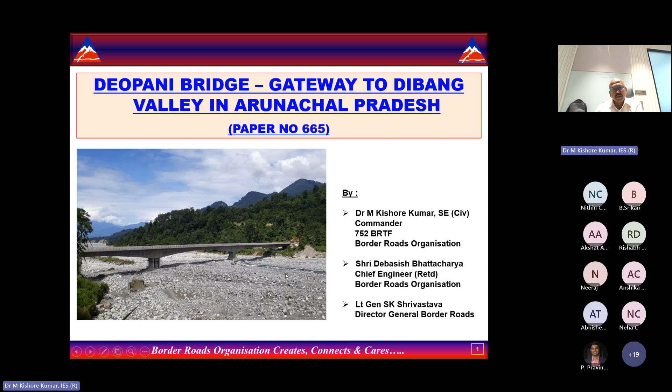My presentation sequence is as follows: I will give you an overview of the bridge site, then salient features of the permanent bridge, project execution, followed by conclusion and a photo gallery of the various works we have done in Arunachal Pradesh.

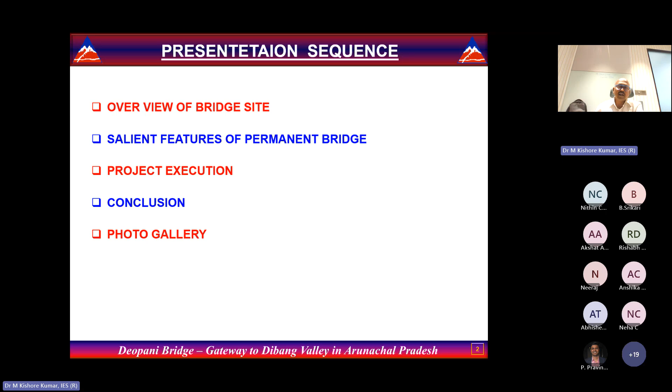The overview of the bridge site: Arunachal Pradesh is in the extreme corner of India, the more eastern part of the northeastern states. The sun rays are experienced first in Arunachal Pradesh, and I happened to be in the easternmost part of Arunachal Pradesh.

There is a district called Lower Dibang Valley, and the bridge is exactly at a place called Roing, which is around 150 kilometers from a place called Dibrugarh. In Assam, on the Brahmaputra, there is the Bhupen Hazarika Setu, a 9.15-kilometer long bridge which was inaugurated in 2017 by the Honorable Prime Minister. Prior to that, I was there from 2015 to 2017.

I had to do the ferry crossing because the bridge was not commissioned. All my logistics, everything was coming via this river gap through the ferry logistics. I'll be covering that in my subsequent slides also.

This is in a very extreme locality which was not connected by road. This is a difficulty which we faced at the time of construction of this bridge.

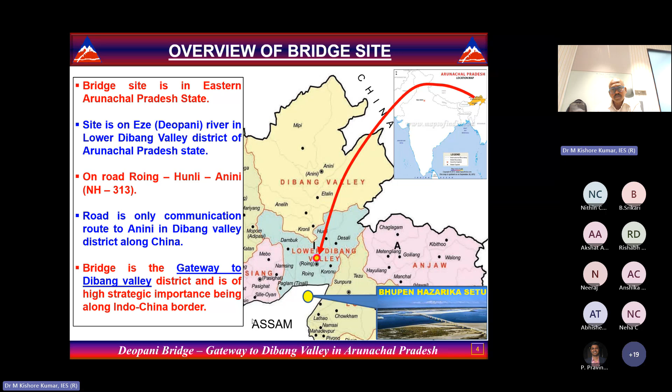The overview of the bridge site: the Deopani is a perennial river and the major tributary of the Dibang River, and the Dibang River is a tributary of the Brahmaputra River. This is my Deopani and this is the Dibang, and you can see the catchment area also. I will show you in the next one.

This picture is in the very lean season. In the monsoons, it will be totally flooded. During floods, the entire width is occupied by the flood waters.

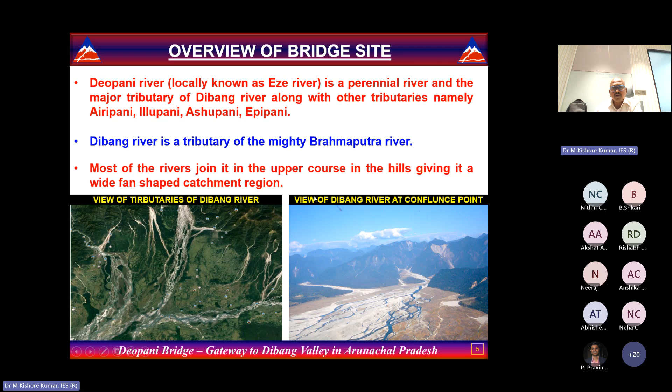Dibang is the tributary of the mighty Brahmaputra River, and most of the rivers join in the upper course. It is a fan-shaped catchment. I will show you in the next slide.

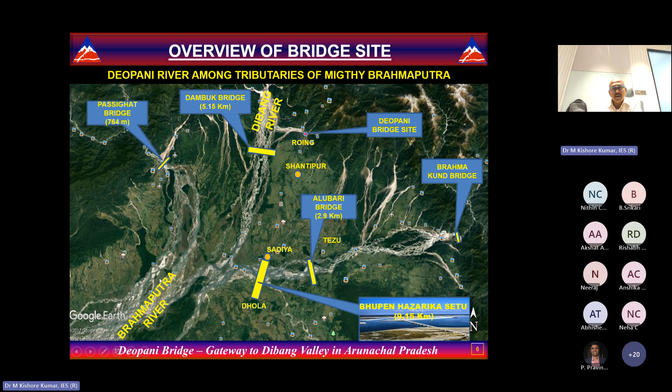This is the bridge site, and this is the Dhola Sadiya bridge, with my Deopani here. Prior to completion of this bridge, we had to ferry cross the mighty Brahmaputra. So my bridge construction logistics, man and material, everything used to come via the river ferry boats. The entire terrain is all tributaries of the river Brahmaputra, and the rivers are very ferocious.

This is my Deopani bridge site, and this is the catchment area. The catchment area has a very steep gradient, and whenever the rains happen, it is just like flash floods. All of a sudden the water rises, and there is a danger of flooding.

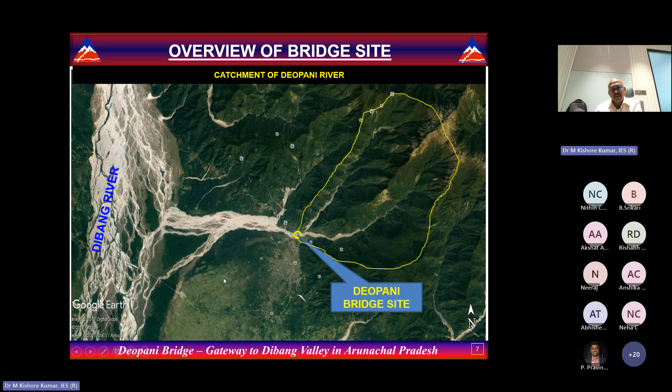I'll show you some photographs where our bridges got damaged, so you can estimate the fury of the river. This is the Mayudia Pass where snowfall occurs, and the catchment area from below Mayudia Pass is the entire catchment area of this Deopani bridge, which is again flowing into the Dibang River, a tributary of the Brahmaputra.

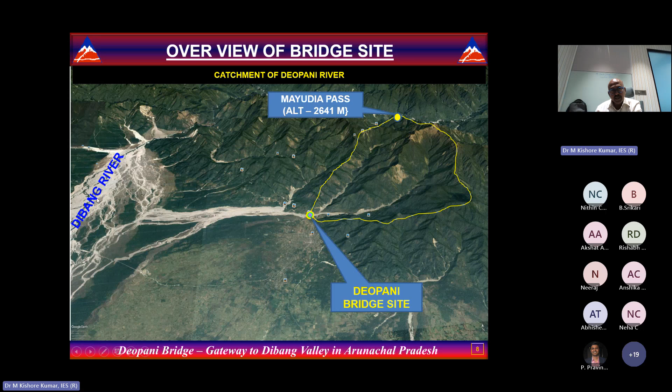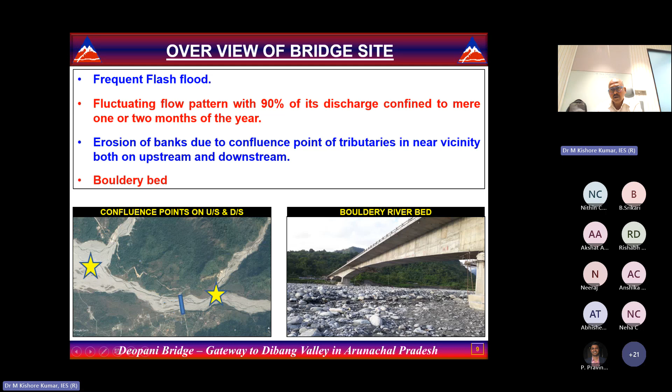This is my bridge site, and you can see the confluence of two streams on the upstream of the bridge, with a fluctuating flow pattern - 90% of the discharge is confined to a mere 1 or 2 months of the year. There is erosion of the banks due to the confluence point, and it's a boulder bed, as you can see here, all filled with boulders. This is my completed bridge.

The turbulent history of the Deopani Bridge: in border roads, we follow stage construction. We initially construct a class 5 road, that is a 4 to 5 meter width road. Then, depending on the traffic and the importance of the road, we widen it to a class 9 road, a single lane road. And if traffic further improves and there is strategic importance, we convert it into a double lane. This is the methodology we follow for road construction.

First of all, the stage construction gives ample access for future expansion of the roads, future widening of the roads. Secondly, we can connect the endpoints. So that is the advantage with stage construction.

Initially, we construct a single lane road, and then further improve it to double lane, intermediate lane. During initial construction, we go for Bailey bridges, that is steel truss bridges. Once the road is commissioned with these steel bridges, we take up construction of permanent bridges in a phased manner. So we complete the road faster, give connectivity, and later give the major permanent bridges, that is RCC, pre-stressed concrete bridges. This is our modus operandi in Border Roads Organization.

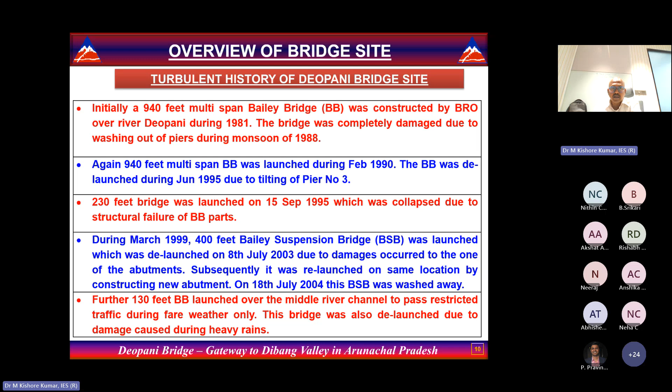There we erected one 400 feet Bailey suspension bridge with two towers on both edges. But this also got collapsed after 5 years, the Bailey suspension bridge. So finally we did a 130 feet Bailey bridge, and the operation was during monsoon time, during flood time we used to de-launch this bridge, and whenever the rains recede we used to relaunch this bridge. So this was our mode of action to cover this river gap.

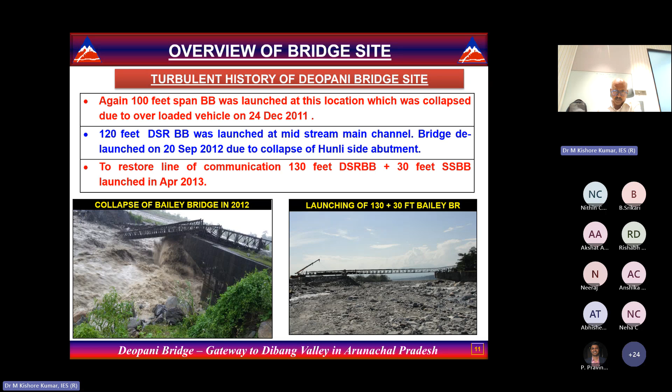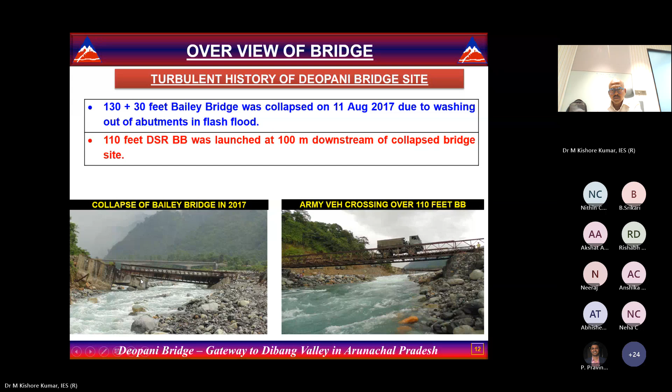This is again the sort of damage you see, the bridge got collapsed, the abutment got tilted, and the entire bridge went down. So this is the fury of the river.

So just to have a permanent solution, one permanent bridge of 300 meters length was planned at this site. We have taken this site on the upstream side of the Bailey suspension bridge. So this is the plan, this is the river, this is the site of the 300 meter permanent bridge at Deopani River.

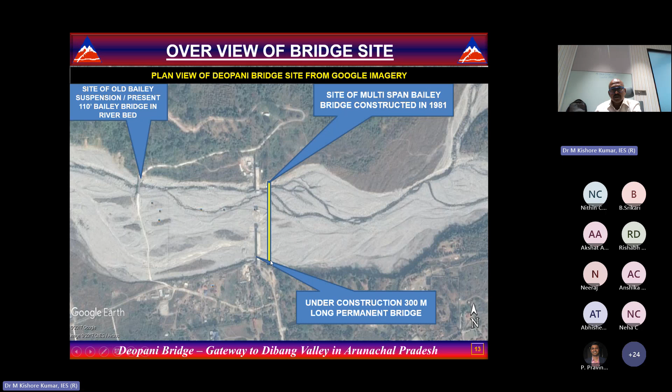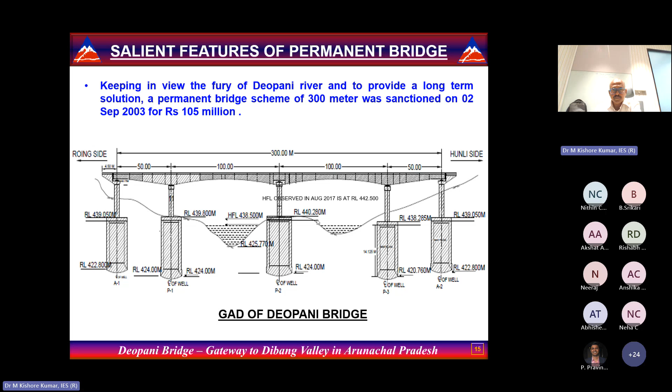The design discharge is 1824 cubic meter per second. Design highest flood level is 438.5 meters. But it surpassed that record, and we experienced the highest flood level going up to 442 meters in 2017. So this was the design discharge adopted at the time of initial planning, but we observed the flood level went up to 442 meters, 4 meters higher.

The span arrangement, as I told you, end spans of 50 meters and middle spans of 100 meters, a total 300 meter bridge. The soil classification is soil mixed with huge boulders. Scour depth considered is 9.1 meter for abutment and 14.38 meter for piers. Foundation is the well foundation.

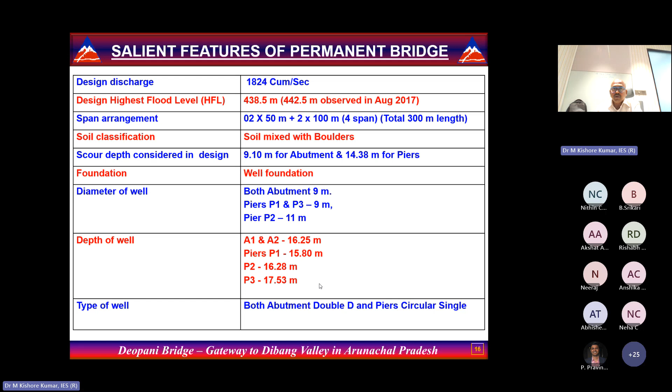Diameter of the well: abutment wells are 9 meters. Piers P1 and P3 are 9 meters, and the central well, P2, is 11 meter diameter. Depth of the well: abutments are 16.25 meters, pier P1 is 15.8 meters, pier well at P2 is 16.28 meters, and pier well at P3 is 17.53 meters. Type of well is single circular well for the piers, and double D for the abutments. So this is the arrangement for the permanent bridge.

The superstructure is a continuous balanced cantilever. Overall width is 12.35 meters. It is a double lane carriageway, 7.8 meters, and it includes footpath also, so that's why it is 12.35 meters. Safety barriers and footpaths: we adopted 0.45 meter safety barrier, 1.5 meter footpath, and 0.35 meter railing.

Type of bearing is the PTFE bearing. Type of expansion joints is rubber seal expansion joints, and wearing coat is RCC. We could have gone for mastic also, but here we were bereft of the equipment, so we went for the RCC.

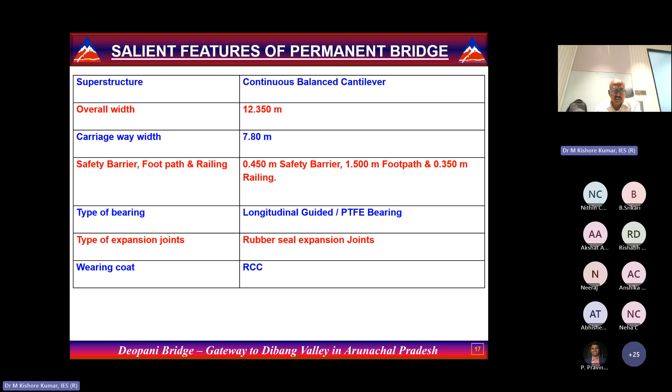Project execution: this 300 meter long bridge was sanctioned in September 2003 for 10.5 crores. So this was my initial estimate sanctioned cost, 10.5 crores in 2003. The contract was awarded to Messrs Banka Infrastructure, a Bombay-based firm. Work commenced on 12 July 2004.

The contracting firm is said to have experienced some financial hardships, causing abandonment of the work in 2007. That is, after commencement of the work, after 3 years, the firm abandoned the work. They had some financial problems and couldn't do much of the work. They did only the abutment work, and then they ditched it and went away. At that time the progress was just 36% at the time of cancellation of the contract in 2008.

With both abutments done, Pier P3 completed, and 64% sinking of P1 and P2 completed by the contractor - this was the state of affairs when the contractor abandoned the work and when the work was cancelled. The progress was 36%. He did only the abutments, both completed, and Pier P3. Then 64% of the sinking he has done in P1 and P2. P1 and P2 are the mid pier wells. So this was the state when the contractor left.

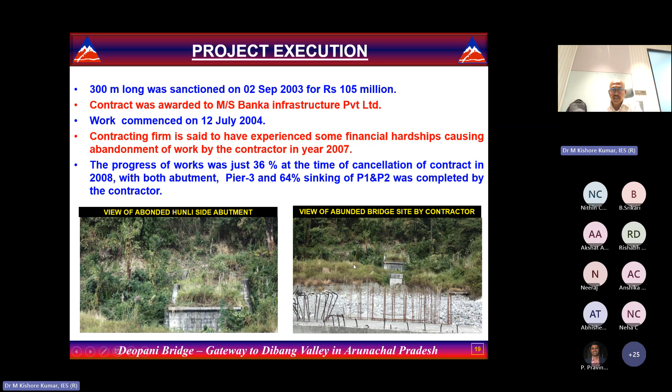The decision taken post cancellation of the contract: the department decided to execute the balance substructure work through departmental manpower. That means P1, P2, and P3 wells were to be sunk, and we had to do the substructure - the pier P2 also we had to construct. So all these things we decided to do departmentally, and superstructure through the risk and cost contract. That is, we would award the work to a different contractor, and whatever the difference in cost, it would be borne by the initial contractor. So that we call the risk and cost contract.

The substructure work through departmental mode was recommenced in the year 2010. That means we took another 5-6 years to decide the mode of execution and all those things, because it involved legal complications. Then completion of the balance substructure work, balance well steining and pier shaft P1 and P2 took even 7 years by BRO departmental resources.

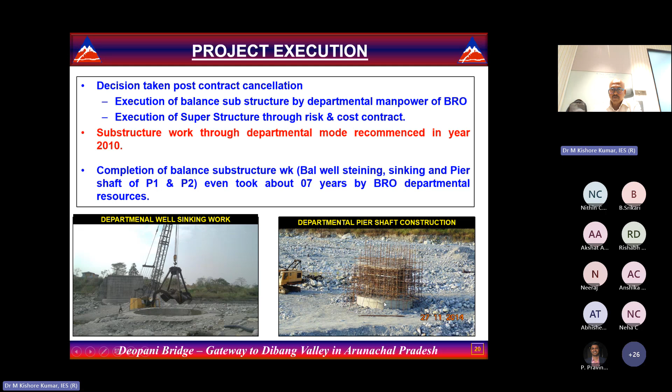If you see here, this is the well sinking in process. This is the grab where they used to grab the earth from the inside - that's how this is a part of the well sinking operation. And this is the pier substructure, the pier under construction over the pier well. This is the pier well capped, so the pier is under construction.

If you see the challenges we faced for the construction, there was encounter of large boulders on the cutting edge. This is a picture where the people are standing - they are 16 meters down the riverbed, inside the river well. You can see these are the boulders, right under the cutting edge. This is the cutting edge, so these are the boulders.

Because of these boulders, we were not able to sink the well. So for that, we had to drill these boulders and blast them and then remove the boulders. Only then could the sinking operation be resumed. So this is the difficulty we used to have. This is the compressed drilling machine - you can see the jackhammer drilling the holes in the boulders, and thereafter we put the gelatin and blasting material and blast it. Blasting also has to be done in such a way that it should not damage the well - it should not damage the well steining or well cutting edge.

The very high seepage rate meant we used to operate 3-4 pumps continuously. Only then could we enter the well and operate inside it. High skin friction was also an issue, so the rate of sinking was very slow.

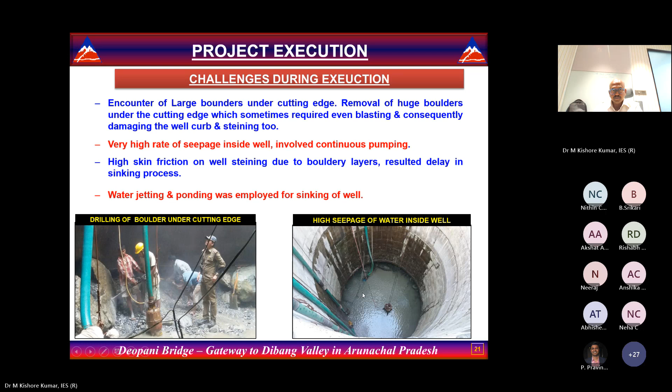For pier well P1, in 2010-11, 4 meters was achieved in the entire year. In 2012-13, only 4 centimeters of sinking was achieved - that was the only progress in the entire year. In 2013-14, 1.3 meters. So for getting 5.37 meters of well sinking, we took almost 8 years.

So this is the well sinking. You can see these are the people standing at the bottom, and this is the cutting edge.

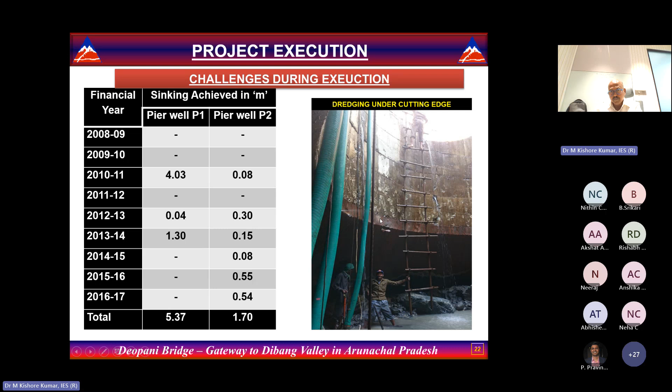Challenges faced during execution include conveyance of logistics and construction stores required via ferry crossing. Our entire vehicles were put on boats and we had to cross the Brahmaputra river to reach the other side.

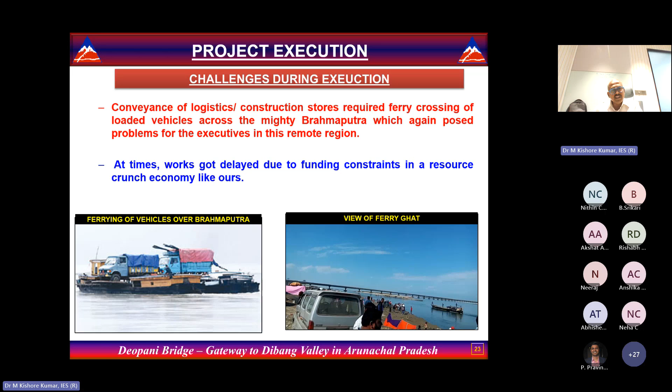At times, works get delayed due to funding constraints in a resource-crunch economy like ours. This is the bridge - it was under construction at that time - and this is the ferry crossing. These are the jetties, the shores of the coast of the Brahmaputra, where we used to ferry cross the materials. Entire logistics - cement, steel, diesel, everything - had to be crossed across the Brahmaputra on these ferries.

Revision in foundation level: we faced a problem because we couldn't do the sinking at the desired rate, and secondly, it was not possible for us to sink beyond a certain level. So we had to decide on the optimum sinking level at which the well can be rested, for which we had to carry out a very exhaustive exercise.

The riverbed is on the foothills and water flows from the hill mass with the mass debris of landslides, causing deposition of muck on the riverbed. Whenever we used to undertake the well sinking operation, the entire slush used to come and fill up the well, so we couldn't carry out the sinking operation. We used to have a window of only 2 to 3 months to undertake this sinking operation.

We cannot predict the rainfall either - sometimes heavy floods happen in July, and sometimes in October or November. These are erratic climatic conditions. The lower bed level at the time of the hydraulic study was 432, but it was further aggraded to 438. A lot of bouldery beds used to come and settle down, and as a result, it's not just degradation - sometimes you get aggradation also, where the river level gets graded up.

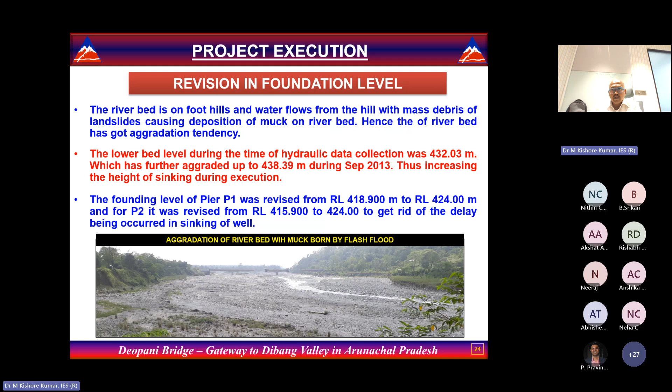The calculations were based on proper design: design discharge was 1824 cubic meters per second, effective linear waterway is 205 meters, silt factor 4, and HFL was 438.5. Based on that, discharge per unit was 8.9 cubic meters per meter. The scour depth was calculated using Lacey's formula: 1.34 times Db squared by Ksf, to the power 1/3.

KSF is the silt factor, which was coming to 3.63 meters. Maximum scour depth is 2 times this, that is 7.26, and founding level is HFL minus the scour depth, DF plus 1/3, with 30% added up. So it is coming to 438.5 minus 7.26, the scour depth, with 30% added, giving 428.82.

And in case 2, if you follow the HFL 440, then it was coming to 430 meters. So ultimately I could plug the well at 424, which is on the safer side, and we could plug the well and go ahead with the substructure works.

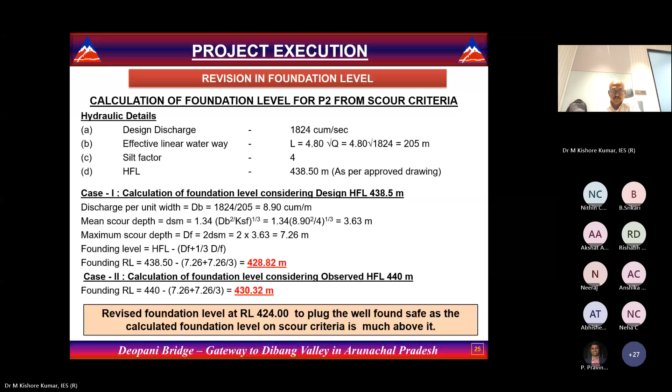Then we could complete the well foundation work, pier works, and had to hand it over to the contractor who had to do the superstructure work. He is M/s Poddar Constructions, Delhi. We awarded the work for 17.6 crores with date of commencement as November 2015. Completion period is 2 years, so that was the period where I had to put all my resources and complete the foundation and substructure work and hand over this work to the contractor for carrying out the superstructure works.

So this is the pier P2. This is the pier head which is constructed, and thereafter this is the CLC gantry where the superstructure will be taken in segmental construction, every 3 meter segment constructed, going in a cantilever mode. I will show you later on. This is the CLC gantry which is erected at the pier head.

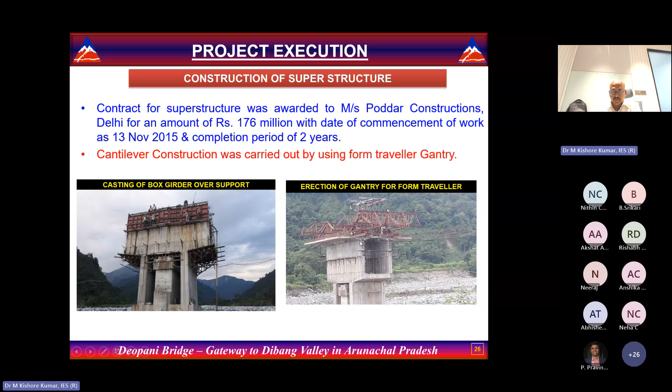This is how the construction was undertaken. This is the initial pier head, and every 3 meter segment we used to construct on both sides. Here also you can see this is the central pier P2, and the superstructure was progressing on both sides of the pier. This is the first span of 50 meters, and the other side of 50 meter span, and these are the 200 meter middle spans. You can see the CLC gantry closing that gap.

And this is the completed bridge where we were doing the load testing of the bridge. So these are the various stages of the bridge, and once we completed the entire thing, the bridge was through, and we were carrying out the load testing.

The project execution, the bridge was completed in 2017, almost 2 months before the scheduled completion date. It was inaugurated by the Union Minister of State for Defence, and the long-awaited completion of the iconic bridge provided great relief to the people of the Dibang Valley. This is the completed bridge, a bird's eye view of the 300-meter long bridge, and it was inspected by the Arunachal Pradesh Chief Minister during construction.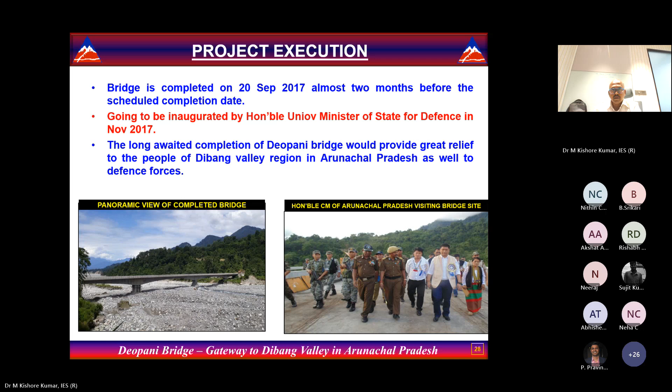My conclusion is this: the bridge construction started in 2003, and finally the construction was completed in 2017, so it took 14 long years. It had a very turbulent phase actually. Initially we had awarded the work to one contractor, and after 4 years he abandoned the work. Then the substructure and foundation work we had to carry out ourselves, and the superstructure work was given to another contractor, but prior to that we had to complete the foundation and substructure work and hand it over. So a lot of challenges we had to face.

My experience is that in 2003 the technology was not that good. But now if you ask me how to bridge this type of gap, I would say instead of going for this multi-span bridge, it could have been better had I gone for a cable stayed bridge for 300 meters span. Cable stayed bridges can span up to 400 meters, so that could have avoided the mid piers, mid wells. We could have saved a lot of time, and maybe the cost would have been slightly more.

Like all of you are aware, the Durgam Cheruvu cable stayed bridge is there. That type of bridge is okay to construct in Hyderabad. But in a place like Arunachal Pradesh, where it is not connected with the road and far off flung areas, it will again have its own challenges.

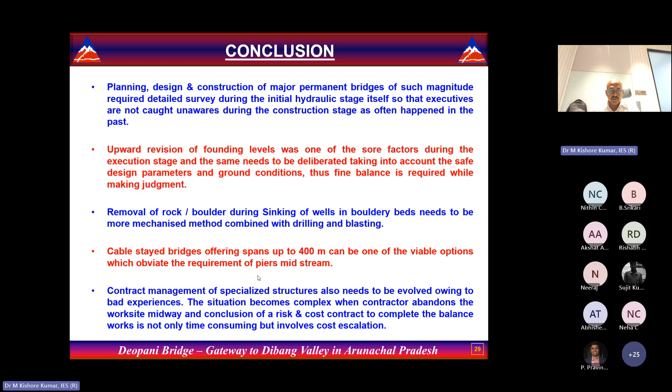Now I've come to the end of the session. This is a brief about the challenges we faced in the construction of the 300-meter long bridge.

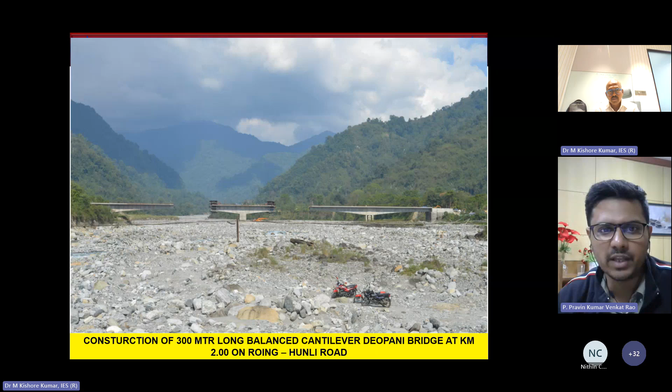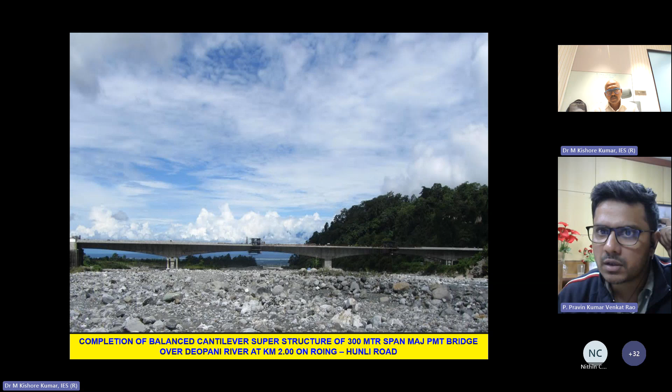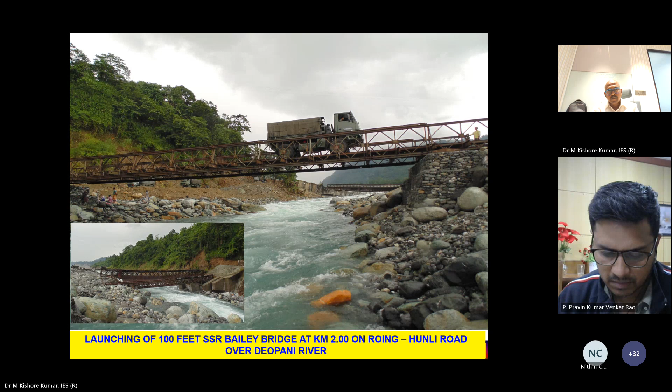Ms. Surabhi Saxena, do you want to ask any question to the speaker? Okay, nevertheless, I have one or two questions which I'll ask you.

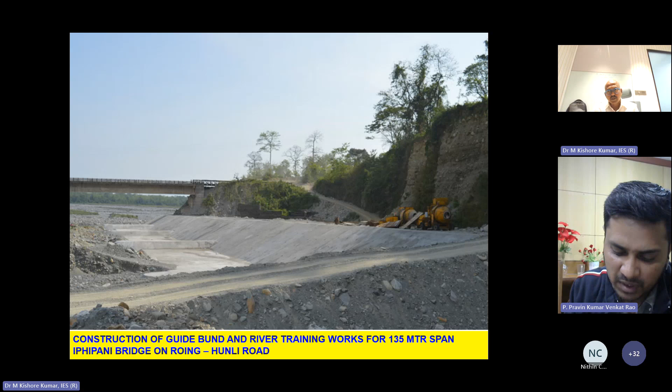What are the difficulties that have been faced, especially by your team, in sinking the well foundation on the riverbed? Could you highlight on that?

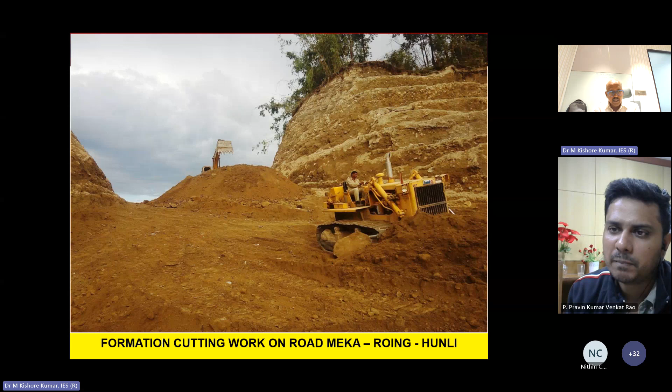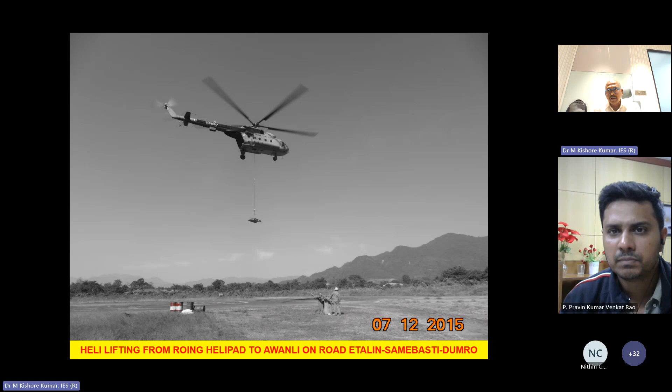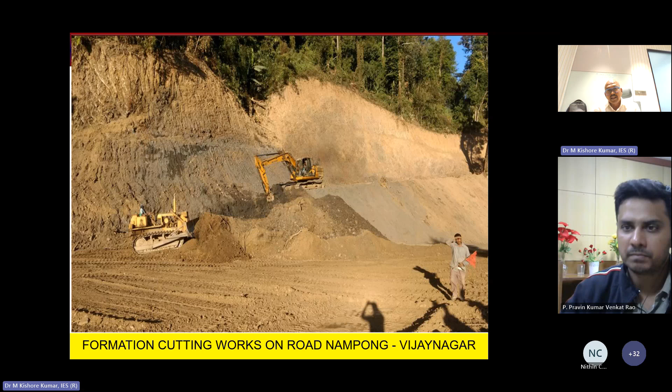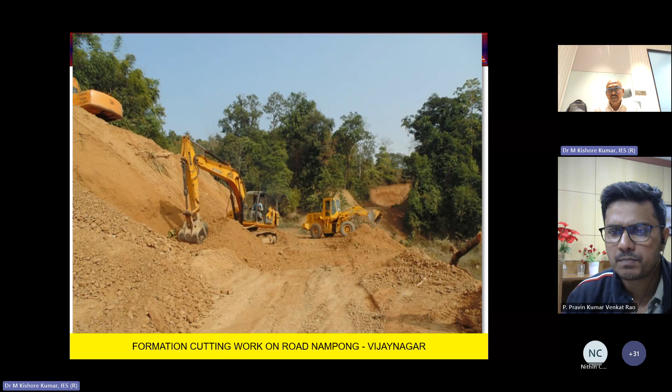Yeah, that's what I'm saying. Well sinking is a very tedious process, requiring a lot of patience first of all. After placing the cutting edge, we have to construct the steining and dredge inside the well, and it has to be done in a balanced way. You cannot extract soil from one side and leave the other, as it leads to tilting of the well. It has to be a planned effort, and it is a continuous effort taking weeks together just for getting 1 centimeter or 1 inch of sinking. So we have to keep patience, and we tried all grabbing techniques.

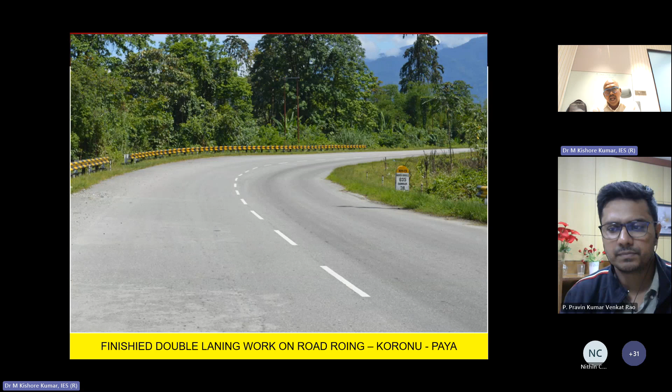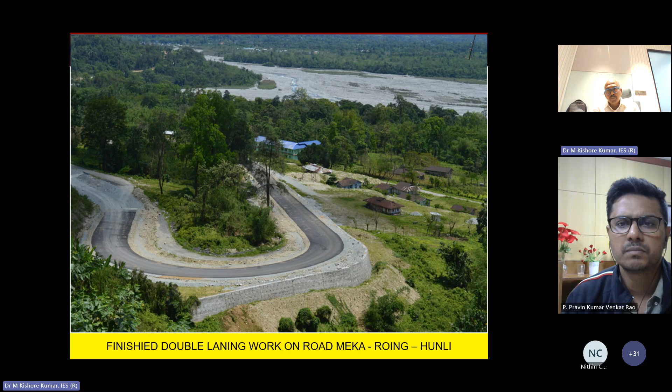Sometimes we faced boulders right under the cutting edge, which was a very challenging situation. We used drilling machines and drillers to remove them. If it was not possible, we had to drill a hole and blast it with very mild blasting, so that the steining, the river well steining, doesn't get damaged. So it has to be a very balanced and calculated approach.

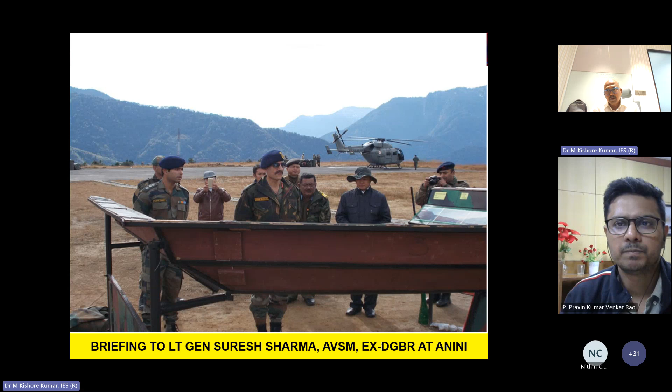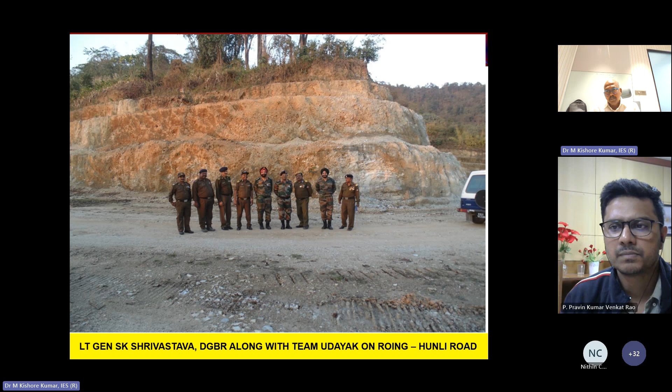And sometimes if the well gets tilted, it is a hell of an effort to rectify the tilt. We used kentledge techniques, grabbing techniques, removal of boulders through blasting, and whatever techniques were available in the textbook, we adopted everything. It was a very classic struggle, and that's why in 1 year we could sink only 4 centimeters.

Other years we could sink only 50 centimeters. It required a lot of patience. The problem was, the moment we removed the sludge and prepared for sinking, all of a sudden we experienced flooding, and the entire well got filled up with boulders and debris. That was a very sad part of it.

Sometimes we experienced casualties also. Our vehicles and some laborers working there got damaged or injured, and there were some deaths also. So that is also there. That is a very challenging phase.

There is a specific question from Dr. Jofin George. Dr. Jofin, you can directly ask the question. Good evening sir, thank you for your wonderful presentation. As a faculty teaching a bridge engineering course, this is even insightful for me. Thanks a lot.

One small clarification - suppose Arunachal will be directly susceptible to very heavy floods during the rainy season, during the monsoon essentially. So do we have any additional measures provided to the foundation, or for the abutments as well as the piers? Any flood scour protection measures in addition?